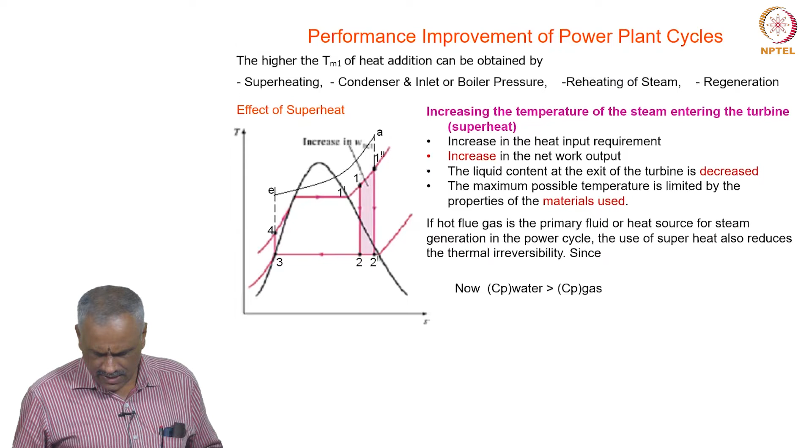We mentioned in the previous class that we can go for superheat like this, but the problem is the metallurgical parameters are the important ones here. So there can be some maximum temperature of the cycle, which is important. If you look at the specific heat of the water, it is greater than that, and mainly the materials used is important in this case, which we discussed last time.

Another thing is, if you go for higher temperatures, like 400 to 500, there is a reduction in strength by 30%. In the previous class we have seen that the maximum steam temperature can go up to 620 degrees Celsius so far.

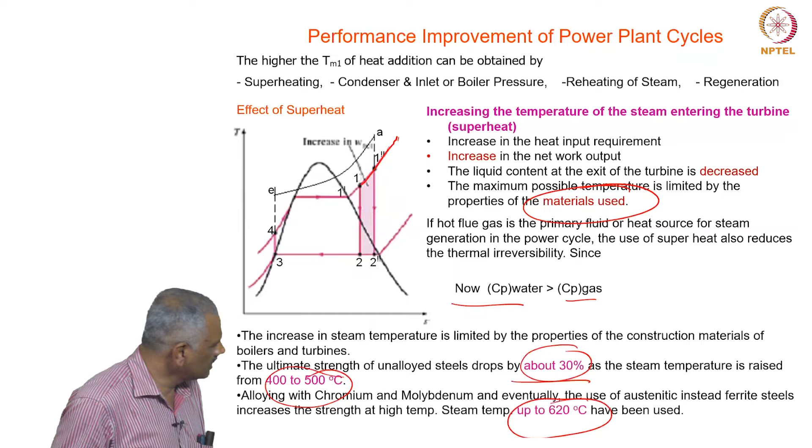Then we also discussed how the pressure plays an important role. Pressure of the heat addition, mainly heat addition pressure, is important here. So we can keep the maximum temperature the same, the cycle's highest temperature the same.

But if you increase the pressure, we get additional work output, but there is a penalty here where we lose some part of the work. One advantage is, if you increase the pressure, obviously you will have high additional work, but there is a reduction in work on the other side.

Not only reduction in work, but also, after the expansion of the steam in the turbine, the exhaust condition of the steam becomes more wet. Therefore, there is a possibility of eroding the blades as we go to higher pressures.

By keeping the cycle temperature the same, as you go for higher pressures, and if you go for single expansion with a single turbine, it is not good, because whatever incremental heat energy or work we get out of that, there is a loss also from the other side. So higher pressure is always better, but not with a single expansion.

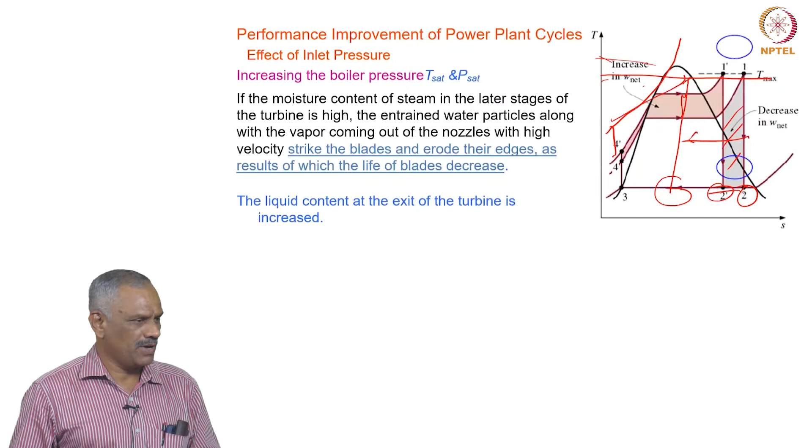But if you go beyond this dome, that is what we discussed in the previous class - this is a supercritical condition. It goes to the supercritical state, exactly out of the saturation line, that is the dome. When you go for supercritical conditions, you cannot keep the same temperature, and if you go for single expansion, you have to also increase the temperature.

So the temperature here, then this point is most important - why? Because it should not go below 88% dryness fraction. So if you increase the pressure and expand from the exit of the boiler or steam generator, you have to go for higher temperatures also.

If you do not want to go for higher temperature, there is another method, reheat, which we will discuss. So this is the supercritical case. As I mentioned, this part is heat addition, and this heat addition in a single component is called a once-through boiler, or supercritical boiler.

Last time I explained this, and the pressures are in this range - supercritical pressure greater than 22.09 megapascal, or 220 bar.

If you draw a line vertically from here, suppose this is a constant pressure line, it goes like this. Then how do you expand - you fix this point here, up to about 88%, and then go vertically up, and wherever it meets, that is the corresponding temperature.

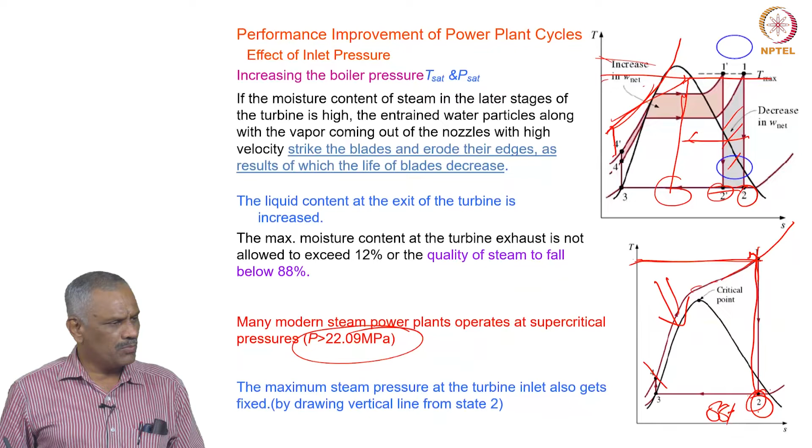So I have shown how a supercritical power plant operates, but in a practical case it is not so. We will see what the practical case is.

Another important thing, which I also mentioned last time, is reducing the pressure of heat rejection. What we discussed previously was increasing the temperature and pressure where you are adding heat. For a heat engine, you have two...

So, you can increase this temperature and pressure here, but why do we not manipulate this T2 and P2 in such a way that we will have higher efficiencies. Here the main important thing is the temperature is the most important thing at heat rejection. You cannot go below atmospheric temperature, so then you can adjust only the pressure according to the atmospheric condition.

Okay, this part you can go further here like this, then you can get this work and go to higher pressures by pumping. Then you get additional area, but the problem is, as we go down, you cannot go down because the temperature is the limiting parameter, since it's atmospheric temperature, and the pressure corresponding to that is the saturation pressure. You have to go for the saturation pressure corresponding to that temperature.

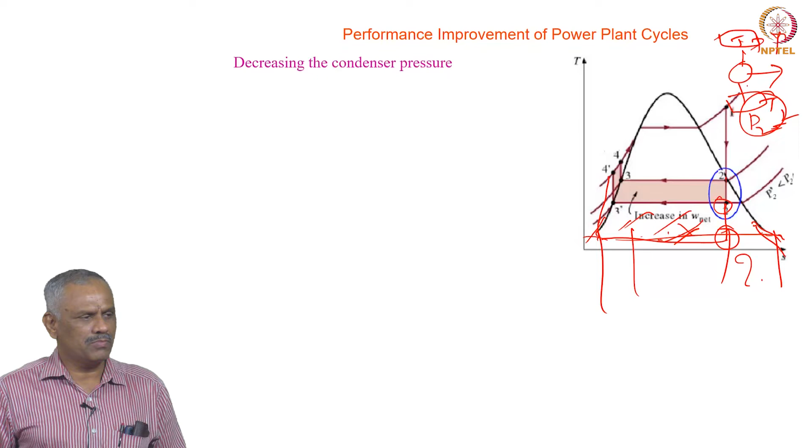So therefore, the only parameter which limits here is this atmospheric temperature and corresponding pressure. This is also a good idea, but we cannot go below it, especially since temperatures in India are very high. So therefore, corresponding pressure may be 0.1 bar, you can go to that suction and do that.

This is another one. I have already explained earlier, whatever is written in the text here, it is already explained.

So this thermal efficiency of the condensing steam power plants will be less in the warm regions, which I have mentioned, as compared to others. So that means the power plant efficiency differs from location to location, depending on the atmospheric condition, and also if in Chennai there is a power plant, it gives different performance at night as compared to the day, because your night time temperatures are different. So therefore, this heat rejection also plays an important role.

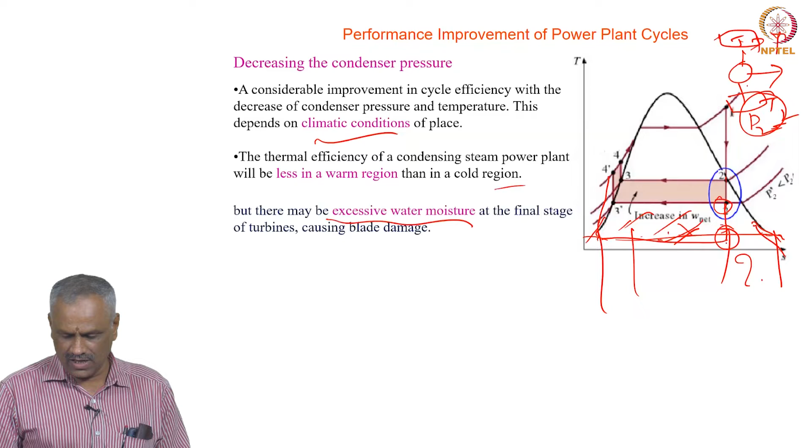That I just mentioned, excessive water content at the exhaust. Here, if you go here, you have excessive water content. At this point 2, this location, you have excessive water content which may erode the blades, and maintenance will be high.

So then we have seen 3 or 4 parameters. We have seen superheat, which means increasing the highest temperature of heat addition, increasing the pressure, supercritical pressure, and reducing the pressure at the condenser. But then, except for superheat, the other two - increasing pressure - have some penalty on the other side. But except for increasing temperature, you cannot increase the temperature beyond a limit because of metallurgical constraints.

So then under these limitations, how to improve the performance and how to come up with an optimal condition, how can the performance of a power plant cycle be improved? This can be done by increasing efficiency without increasing the temperature of the turbine, because temperature is the most important highest parameter. We will always keep the most important parameter, the highest temperature of the cycle, and then with respect to that, how do we improve the performance of the system, within the maximum permissible temperature.

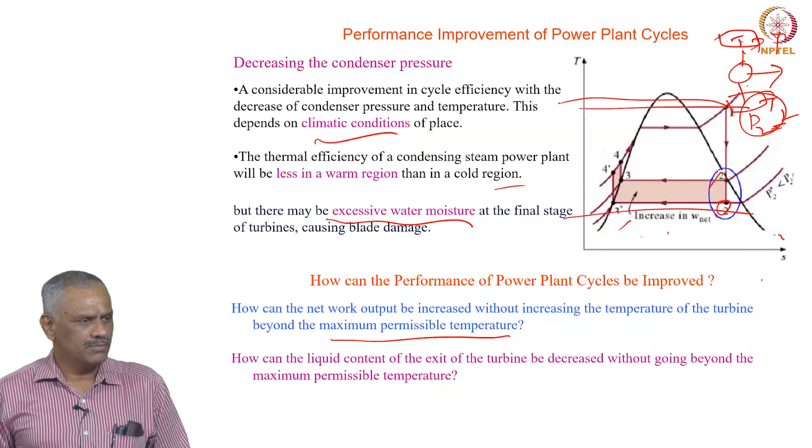So another important factor is this liquid content at the exhaust of the turbine. We cannot go beyond the maximum permissible temperature, because our limiting parameters are here and here, so you operate within that dome. How do you come up with the best way? Because you have both highest temperature and lowest temperature limitations, that is what determines your efficiency, 1 minus T2 by T1. So within these given conditions, how do we make the best or most efficient power plant?

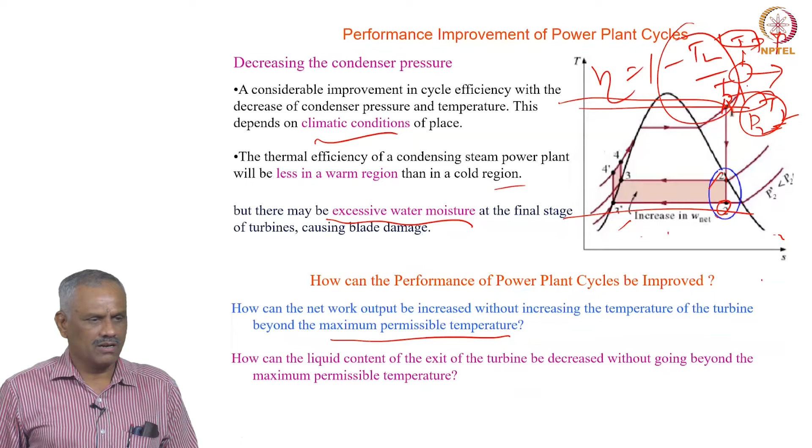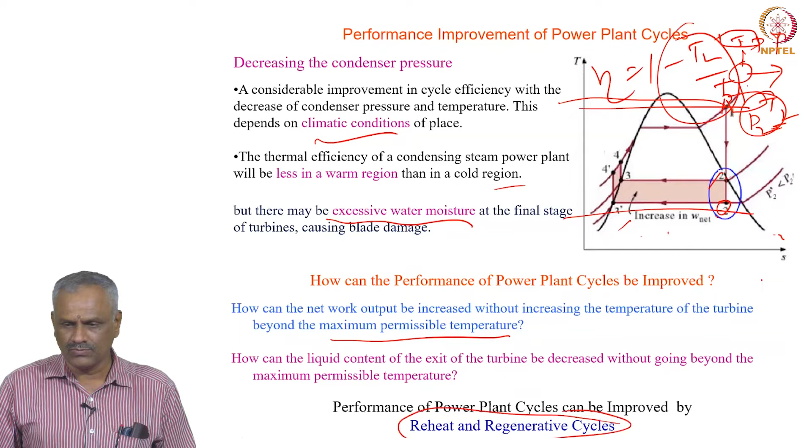So then the performance improvement can be done by two important aspects, that is reheat and regeneration. Reheat and regeneration - what is reheat, what is regeneration, I will discuss.

We will discuss with the first pressure. So if you increase this initial one, it was like this here - I think it is not working.

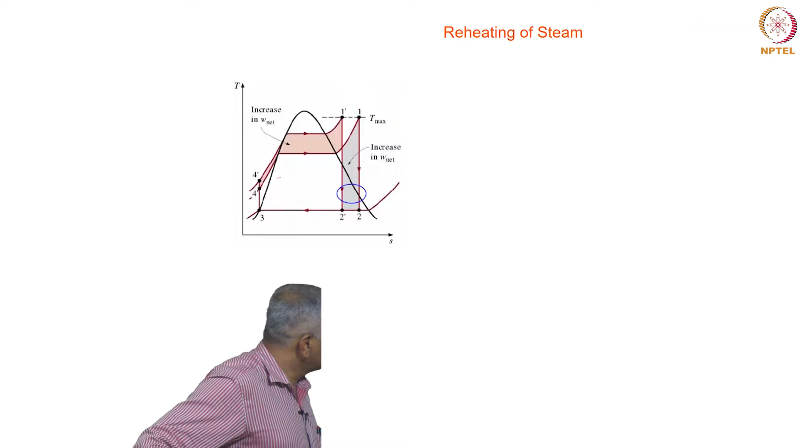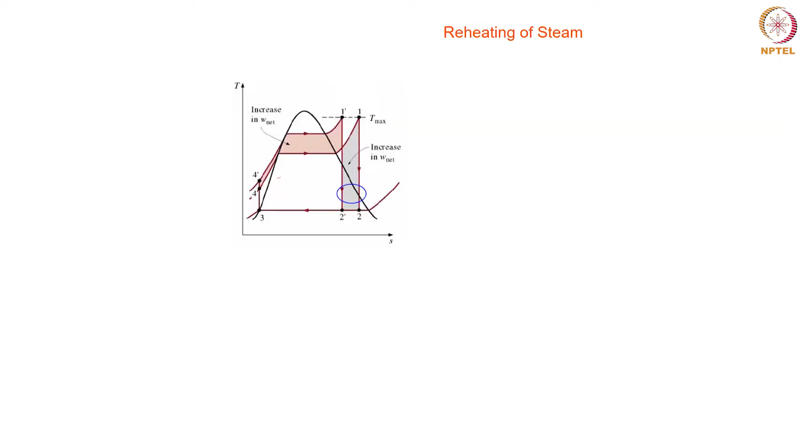Initially, no board was there. We thought we'll increase the pressure, but there's a disadvantage. For the initial cycle it was 1, 2, 3, 4, but if you increase the pressure there's an increase in work output, but a decrease here too. So why don't we compare these two, combine them, going for a higher temperature as well as this one, and come up with a new cycle that combines this.

That is important here. How do we do that? Keeping that in mind, this is the one which you can come up with. Anyhow, my photograph is not important. We can use the board, but I will make use of this itself. So if you combine this, your new cycle will look like this. See here, 1, 2, 3, 4, 5, 6 and back to 1. This is the cycle.

What we're doing is, initially in the boiler, heat is added between 6 and 1. This is similar to the previous one, and from there you reach the highest temperature of the cycle. Then you expand to some level in a turbine, take the steam and put it back into the boiler, which consists of the entire system. Then you add more heat to raise its temperature to the highest again, there's some work done, and after that you further expand, add heat to the same maximum temperature, and from there expand till the condenser.

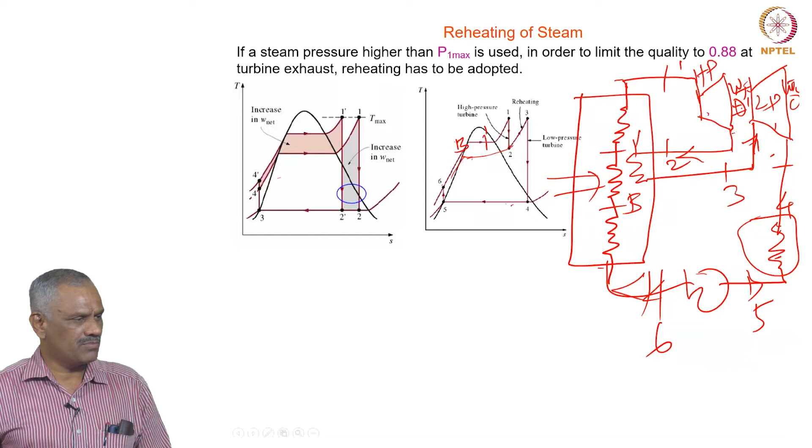After expansion in the first turbine, it goes to some pressure here, this is a pressure line. At this pressure you're further heating. Since the first turbine operates at higher pressure, this is called the HP turbine, high pressure turbine, and this is the LP, low pressure turbine, because it operates at low pressure compared to this one.

Once you plot this TS diagram, it's easy to find out what you essentially need: the efficiency of this. What is efficiency? W net by Q1. What is Q1 here? What is W net here? W net equals the power developed.

This is WT1 plus WT2, the work done here as well as work done here, minus pump work—the pump is here, only one pump. So W net by Q1, where heat is added. Heat is added here, from 6 to 1. But anyhow, we represent everything in terms of enthalpies later. Is that the only heat added, or is there any other additional heat added?

Plus Q2 to 3, this here also heat added, correct? So therefore, this is the heat addition. Now how do you find out all these? Simple, find out enthalpies at different locations from the steam table and substitute.

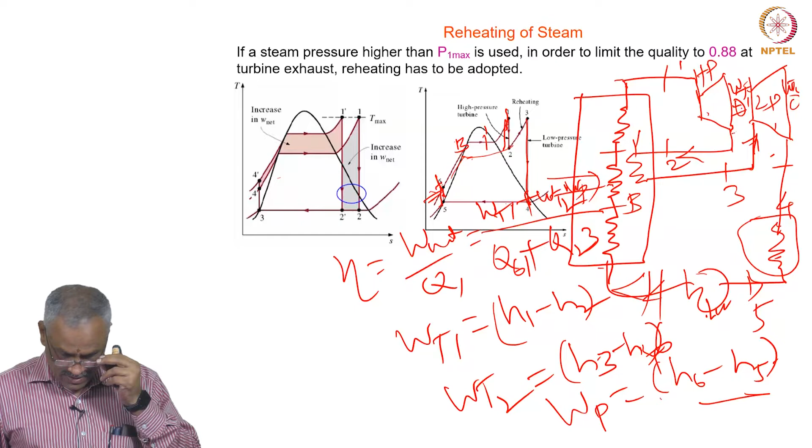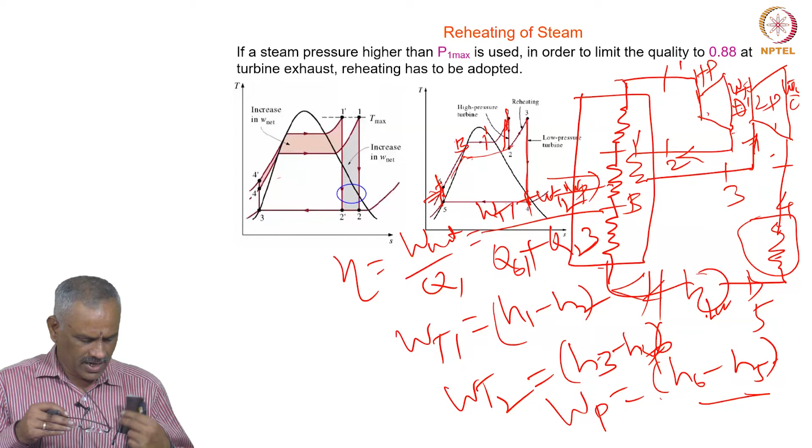But here, when I have included minus, in this efficiency equation I put minus WT plus WT1 plus WT2 minus WP. In that, net it is coming. So I think now I'll erase this, it is clumsy, I will erase all this.

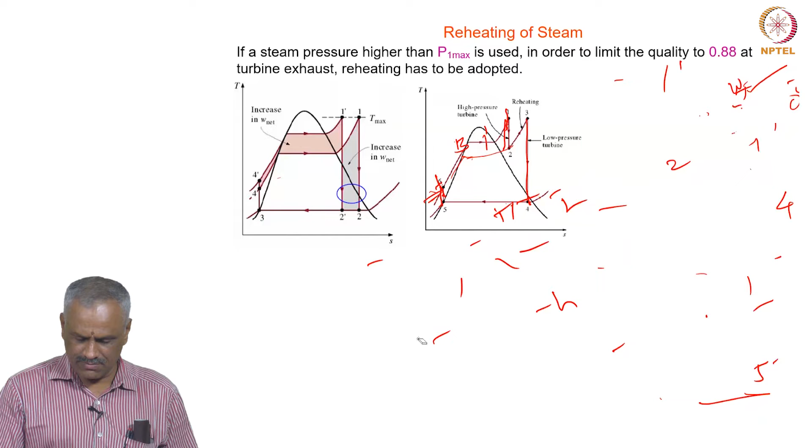I hope you have seen that schematic. Again I will redraw that, for better understanding you can see here. Generally I put heating as a resistor, but sometimes they draw this boiler as one box, and the condenser is written in this. Different notations are there - you can also use a resistor to transfer heat from one to the other, as a heat exchanger. So this is what you can see here.

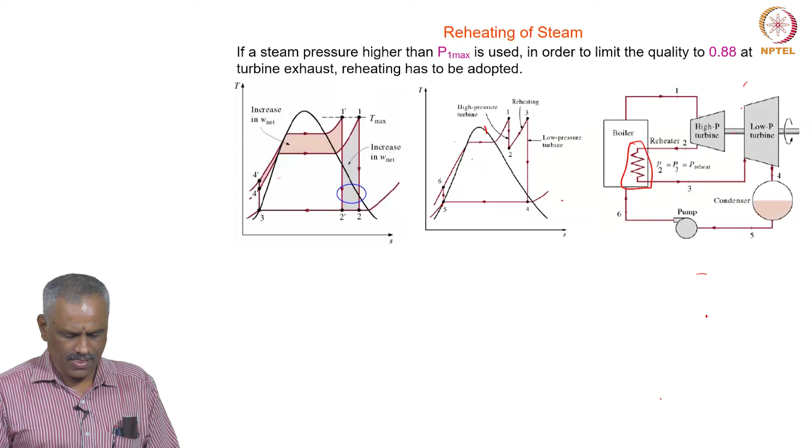One is high pressure and low pressure, and the part where the heating is done before expansion in the second turbine is called the reheater. So this part is called reheater, because we are reheating the same steam.

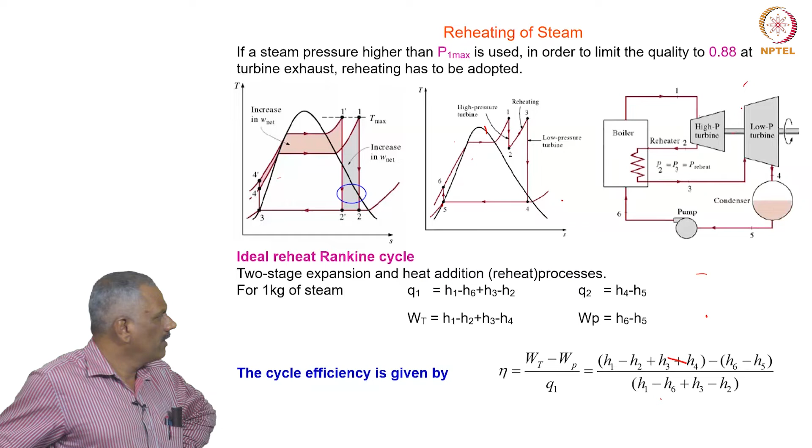I think I have mentioned this - this is an ideal cycle which I have already covered, I need not repeat that again, you can put it here. Cycle efficiency is given by this - I think this is minus here, but not plus, okay.

So now, what is the net - whether this net output will increase or decrease? Is reheat good or bad? Why is it good? Because we are getting some additional output, but we are also adding some additional input. This part we are adding, additional heat, but you are getting some additional output. So when you do this, it should be positive, then only it is worth it, otherwise it is not worth it.

The work output you get for the input you give - the additional work output for the additional input should be more than or on the positive side, then only you can go for reheat. Otherwise, if you are heating more but the additional output you get is less than that, then it is no use. So therefore the net output of the plant increases with reheat, so it will increase.

And apart from this advantage, another advantage is we can operate - see, if it would have been a single stage, it would have come here, but since we are increasing here, the quality of turbine exhaust is also improving. Improving means you can make it close to 88%, that is the improvement. So the advantage is you can go for higher pressures by going for reheat.

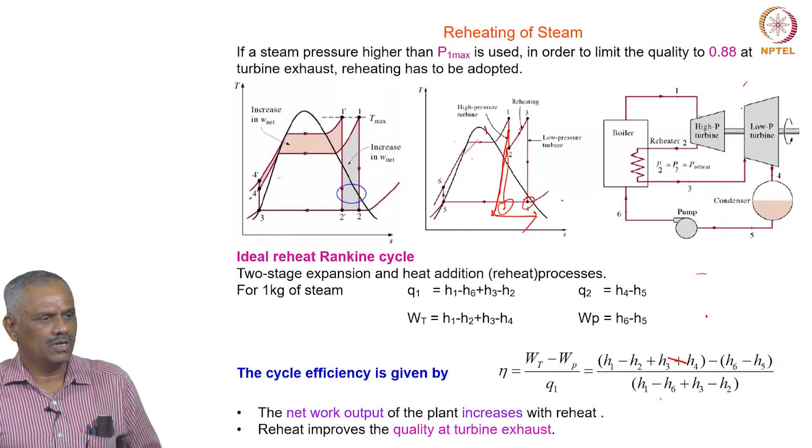If you go for higher pressure, what happens - as you go to higher pressure, if you expand in a single stage, it becomes wet. Instead, you go for reheat and expand further. So the advantage is operating at higher pressure and also getting some additional output. This is the one which I have already mentioned here.

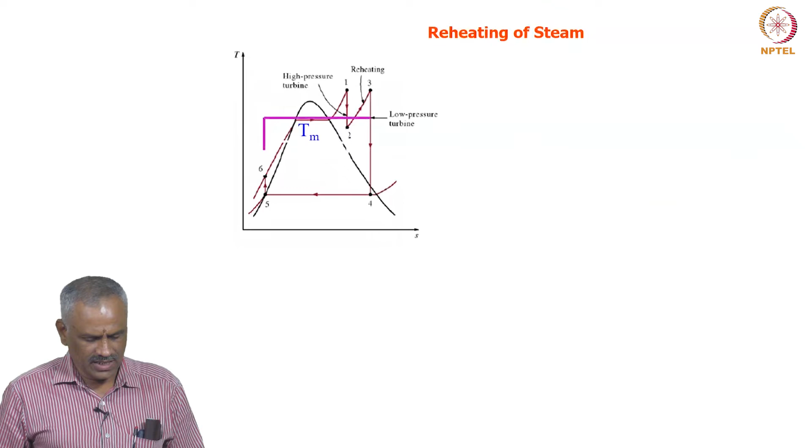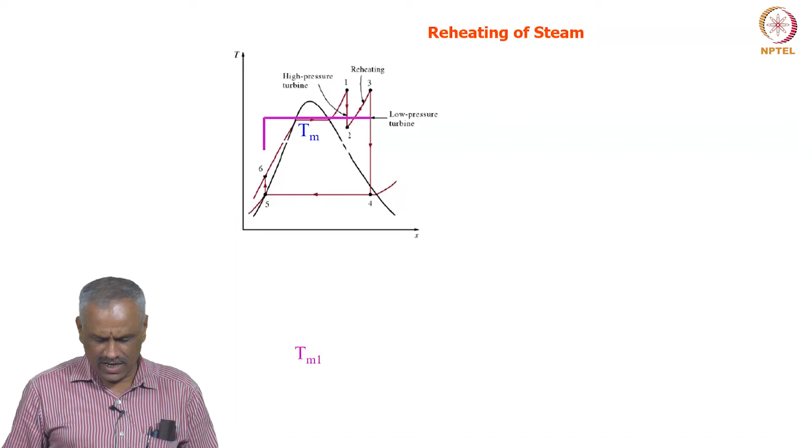Then actually the main objective of improving the performance is improving the mean temperature of heat addition. Always in this case we have to increase the mean temperature of heat addition. In the previous case we found that delta H by delta S is called the mean temperature of heat addition. So here, this mean temperature of heat addition is improved because the average area under this curve is improving with the given temperature. So therefore the mean temperature of heat addition increases, and it increases the superheat by using higher pressure also - just now I mentioned the same thing, high temperature steam.

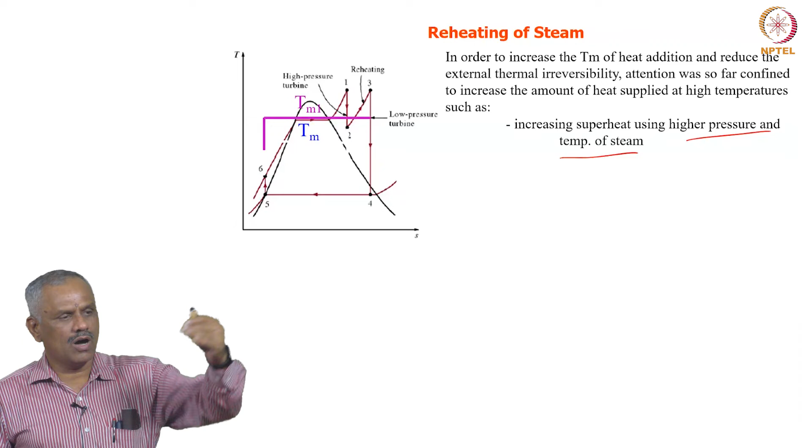The advantage of reheat is you can also operate at higher pressures. Then using reheat, this Tm, the mean temperature of heat addition, is also increased by reducing the amount of heat added at low temperature. This means the heat added between 6 and 1 is at high pressures, this is the higher pressure boiler, and in the reheater once you expand, the pressure is reducing, so that heat addition is at low pressure. In the reheater the pressure is low, so there we are adding heat, that is the meaning of that.

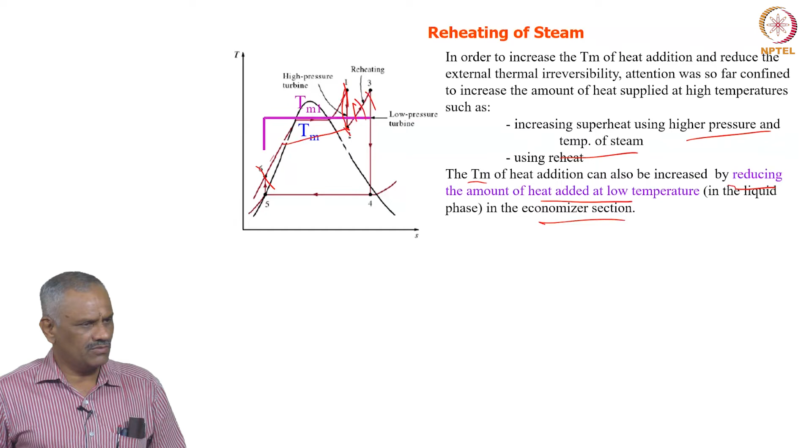So by doing this, instead of only transferring heat in the 3 components, you are also transferring additional heat in another component. Because we have the highest flame temperature of 1800 degrees Celsius, by adding reheat you are extracting more energy from the flue gases, otherwise it would have gone waste to the atmosphere. Generally 2/3 is rejected into the atmosphere.

So in the furnace, this irreversibility could be eliminated, but the problem is if you look at the one stage single subcritical single phase diagram which I had shown you earlier, this is where we defined pinch points in the previous classes. What is the pinch point? The minimum temperature difference between the 2 streams is called the pinch point. One pinch point is here and another pinch point is here, because this is the flue gas side and this is the working fluid.

It goes in the opposite direction, counter flow heat exchangers. In a network of heat exchangers, wherever you have a minimum temperature difference between the 2 streams is called pinch point. If you have a maximum difference, then it's not good, because it involves high irreversibility. In this figure, where do you have high irreversibility? One point is here, because here you have a huge temperature difference, another point is here.

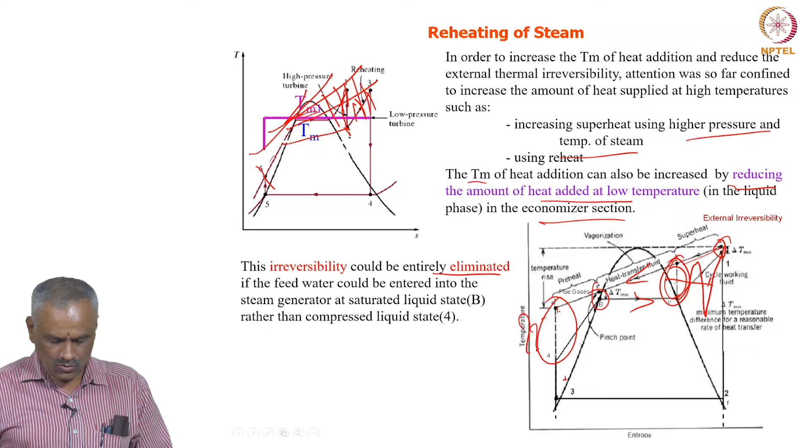But there is a big irreversibility here, a large amount of irreversibility between this and this, okay, this and this. This irreversibility is a major thing, so this irreversibility we should minimize. How? That is called regeneration. If you eliminate, you cannot completely eliminate, but you can reduce that by a process called regeneration. So what is the meaning of regeneration?

The meaning of regeneration is you take the heat internally and add it back, regeneration. You have expanded here, till here. Then what you do is you take this part, generally take this part, for example, I will plot a schematic. This is a simple one without reheat.

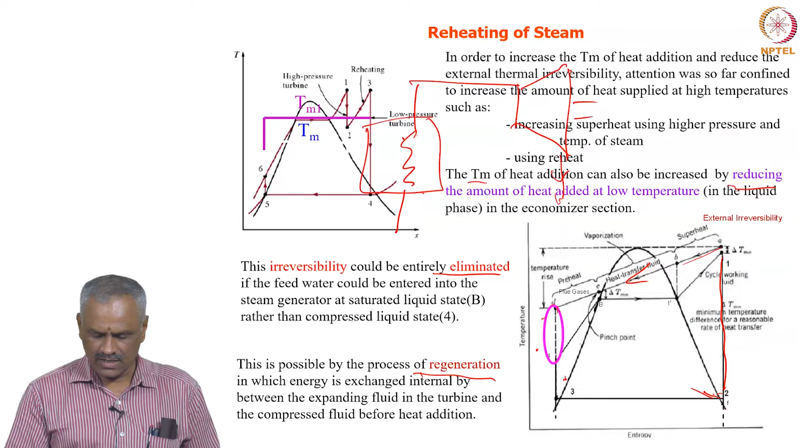This is a boiler and it goes to the turbine here, and after expansion you take this. During expansion, from here to here, what happens is its enthalpy drops and also its specific volume increases. That is why you have an expander.

What you do is you take this, turn around the turbine and then bring it and pump it here. It is called regeneration. That means while the steam is being expanded in the turbine, you bring some part of the heat and add it to the outgoing or incoming working fluid, that is called regeneration. Maybe, since this is a bit clumsy, I will show you in the next one.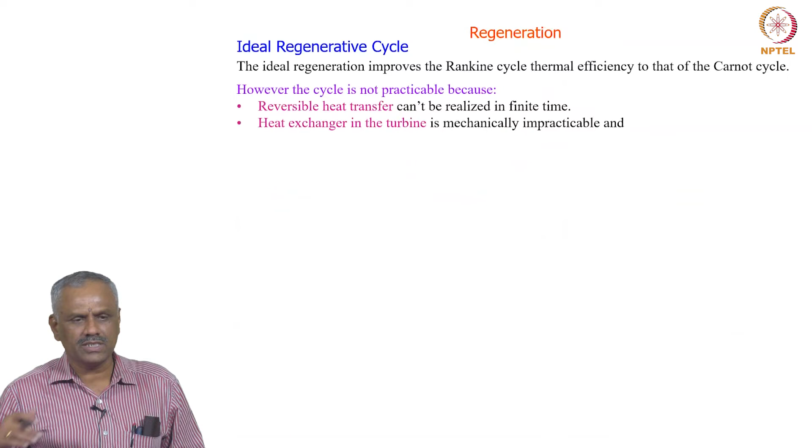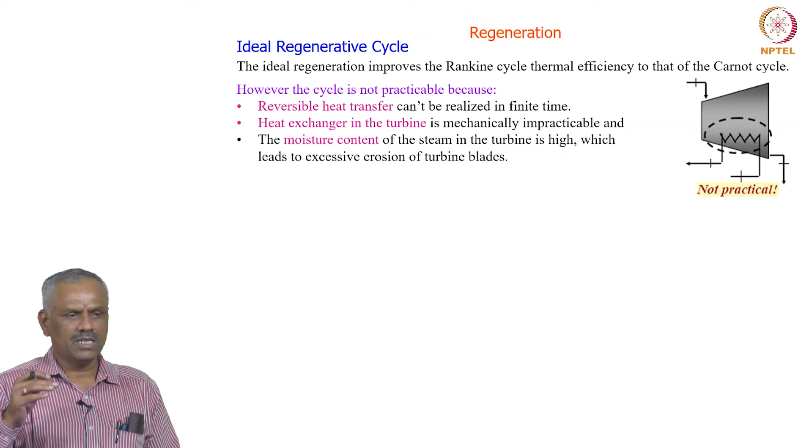The ideal regeneration means it is reversible. In a turbine, expansion is isentropic, meaning there is no heat transfer, it is reversible. So then you can wind a heat exchanger within the turbine mechanically. You can take some part of the turbine's heat during the expansion and bring it back. So the one I showed you earlier, where you wind or wrap the steam pipes around the turbine after expansion, so that heat during the expansion is transferred to this, and the inlet fluid going into the boiler will be at a higher temperature, so that you will have less irreversibility. But the ideal process of expansion is isentropic.

Isentropic means there should not be any heat transfer, but when you introduce some heat exchanger and wrap it, it is not so. See, your dome is like this. This is isentropic expansion, but when you remove heat, this cannot be isentropic - it will cool, it will lose some heat to this one. Then obviously we are going to lose some heat.

Have you studied Stirling engine? Stirling engine is a regenerative engine. During the expansion, some heat is transferred, so instead of heating, you will have a better heat transfer on the other side.

I will show you this, but it is not practical - ideal regeneration. Ideal regeneration means during expansion you remove heat, but that is not possible because we cannot have a heat exchanger within the turbine like this. And second, it may not be ideal expansion because it deviates. So therefore I have mentioned this.

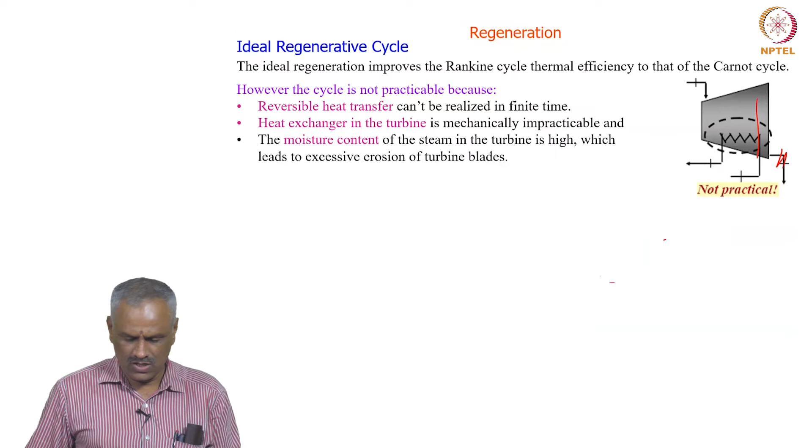Another point is when you remove heat from the turbine, the exhaust steam will become more wet, so then the last stage turbine blades will get eroded. Therefore ideal regeneration is not possible. So we have to go for a different way of regeneration, using heat, but a different regeneration.

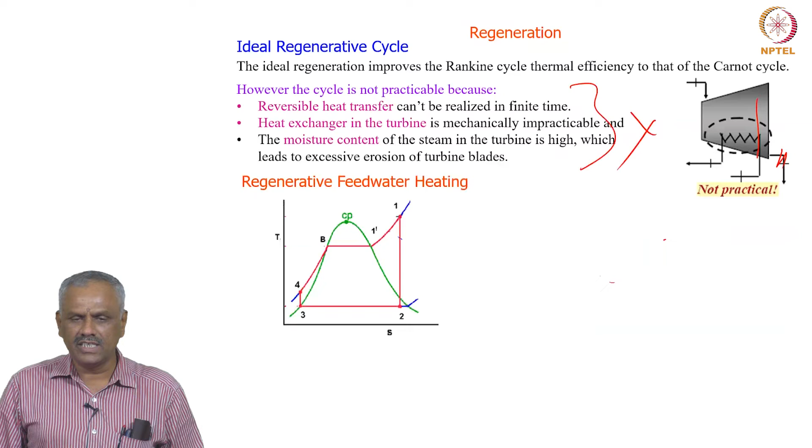This is called regenerative feed water heating. Before entering into the boiler - see here, the water is pumped to this boiler part. Before entering here, you bring this heat and raise the temperature, so that this irreversibility is reduced from here to here.

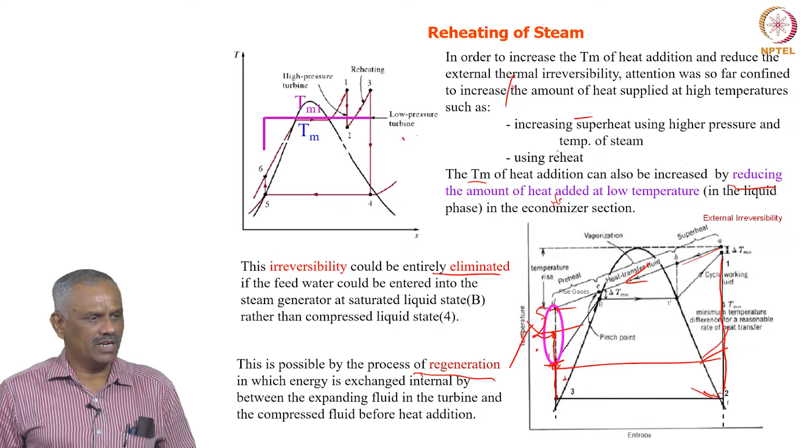What you do is take some part of the heat - instead of doing it in the turbine, you take some part after expansion and mix it. That is called regenerative feed water heating. I will show you how it works.

So this is the normal cycle, the standard cycle: 1, 2, 3, 4, B, 1 prime, 1. This is a single stage turbine, single expansion. After expanding to some level, then you take it this way.

After expansion from 1 to 2, some part of the mass is taken. If you take 1 kg of mass entering the turbine, after a certain level of expansion you take m1 mass, and 1 minus m1 is further expanded here. Then the heat is rejected in the condenser and pumped to the next pressure level, and combined - 1 minus m1 with m1 - then it becomes 1 kg and goes on.

Have you understood that some part is taken? After expansion in the turbine, some mass of the steam is taken at low pressure and added with this, so that this heat is combined with this.

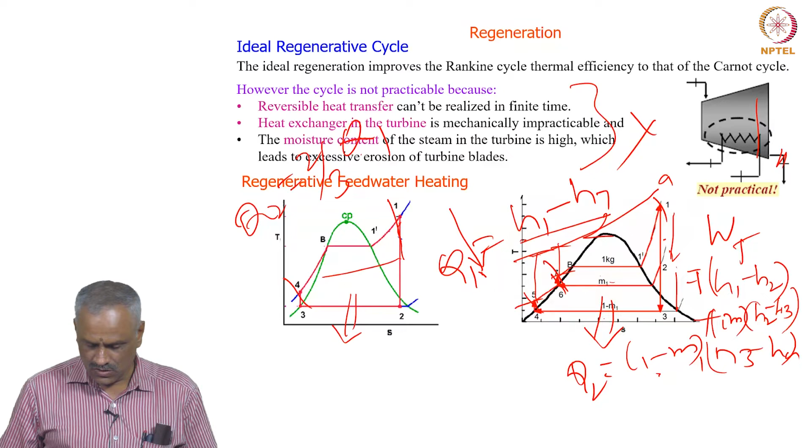Is it clear? So therefore, the heat rejection - you are reducing the irreversibility, you are also going for reduction in the condenser size. So this is the advantage, I hope you understood that. So now the heat rejection will be less in this case.

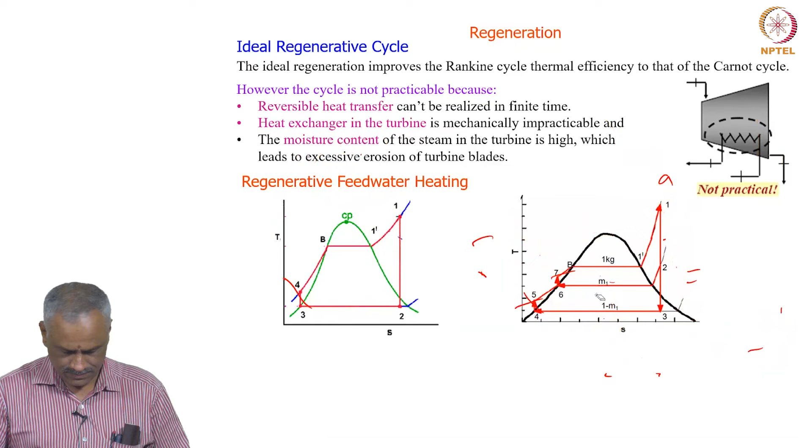Now another important thing is the economizer size, because this part is economizer, from here to here. If you go here, now the economizer size is only this much. We are not only reducing the condenser size, but also the economizer size. The economizer has to raise heat from here to here, whereas here the economizer will be from here to here. So that is an advantage.

So now, based on this, you can say that this is called regeneration. Regeneration means taking steam after expansion at some level and mixing it with the feed water to heat it - that is called regeneration.

So now, how many times have we taken this? Once, a single time. You can take more times also. You can take steam here and add here, and take here and add here. You can have infinite steps if you take it continuous. But then your cost and other issues will come.

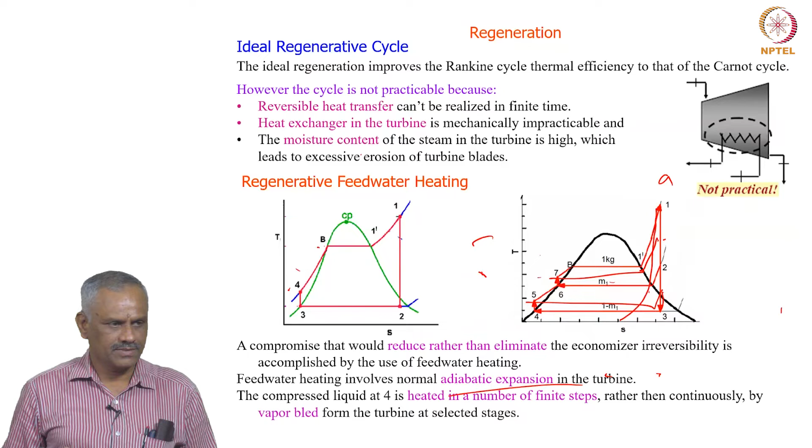So therefore, you have to go for not one time, maybe finite times. In a modern power plant, it may vary from 7 to 9 feed water heaters. We will discuss how that is.

So this is called feed water heating, which is a heat exchanger. Now I will show you how you represent this in terms of a schematic.

There are 3 types. If you look at here, this part where the heat is added to the water which is coming from the pump - these are mixed and further pumped here. So what is the source of irreversibility? We have mentioned combustion is one, heat transfer is another, then friction - fluid and solid friction. The other one is throttling, and another is mixing.

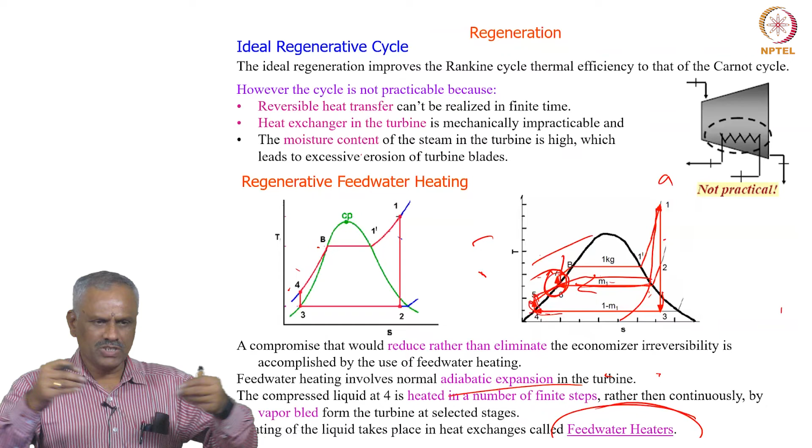If you bring two streams and mix them, then it is irreversible. Here at this point we are bringing one stream at this pressure with m1 mass, and another we are taking from this pressure line, and pumping further. So that means you are mixing two streams. When you mix two streams, there is a possibility of irreversibility here.

Some irreversibility is created. But then how do we avoid this irreversibility? Then we have to go for configuration of feed water heaters.

There are different types of feed water heaters, mainly 3 types. One is open or direct contact type. The other one is a closed with drain cascaded backward, and the other one is pumped forward, the drains pumped forward.

I will explain how this works. Open or direct contact means you bring one high pressure steam and low pressure steam and mix it. That is simple open mixing, but the problem is irreversibility. What you do in the other type is bring high pressure, high temperature steam and heat the other one, but there is no contact between them, like a heat exchanger. This is a contact heat exchanger, the other is a non-contact heat exchanger.

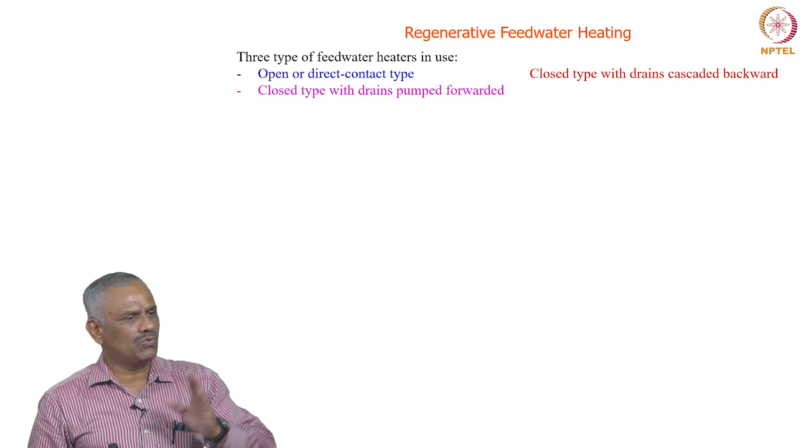The other question is how, after transferring heat, whether you go forward or backward, which we have to see. We will discuss this quickly one after the other - the regenerative cycle or regeneration cycle with the open feed water heater, the one which I showed you here just now.

What happens is that at pressure P1, this is the boiler pressure at the highest point, then this is P1, this is P2 and this is P3, which is the condenser pressure. So you are expanding from high pressure to low pressure and further low pressure.

So then one stream is taken with mass m at point 2 and added here with the other stream of mass 1 minus m from lower pressure. This is at one pressure and this is another pressure. So what you can do is, where are we adding these 2 streams? At this point, okay.

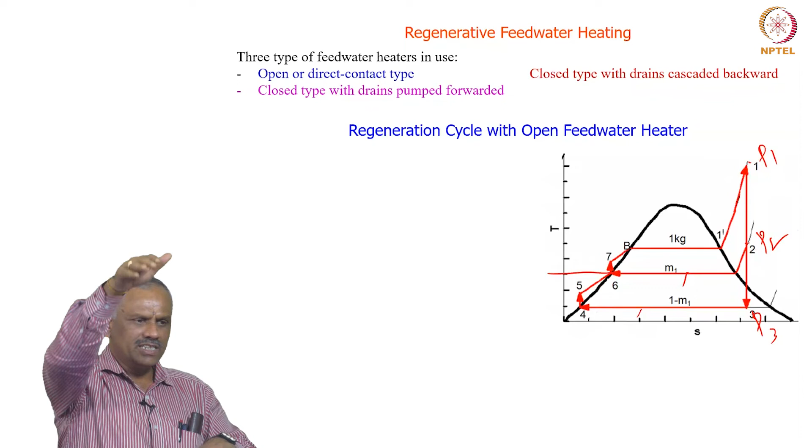Taking a stream at high pressure and mixing it into the low pressure, there is no problem, because we are going high pressure to low. But if I want to add low pressure steam at a higher pressure, what do I have to do? See, this one is coming here, bringing it to here, there is no need, it comes automatically because it is at lower pressure.

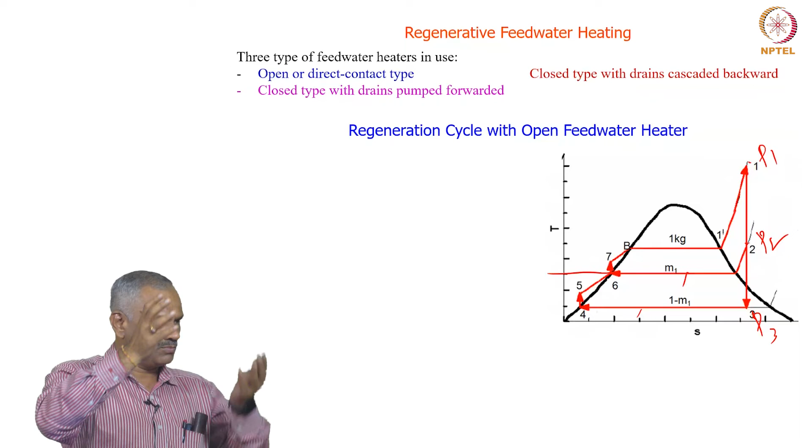But I want to mix here, take this and put it here. What is the meaning of that? I have to pump it, I have to pressurize it to that level. So therefore one pump is here. I will show you the schematic of how it will be.

So now if you look at the schematic here, after expansion in the turbine - again I am using different symbols at different times, because first I used resistances, and this is why, because you should have exposure to different symbols. I don't want to have a consistent symbol, so that when you refer to different books, different symbols are there, but whenever I show that, I will mention exactly what it is.

So this turbine, after expansion to point 2, mass m is taken here, and 1 minus m is further expanded here, then goes to the condenser and heat is rejected, and from this condenser the pressure is lower than this pressure. So we are mixing at a middle point where this is taken and then this is the condenser.

So you need to pump it to this pressure, therefore you need a pump, and after mixing this, you have to go to the boiler pressure. This is the boiler pressure, therefore you have to again further pump it after combining the 2 streams - this is another pump, clear. This pump operates between pressure 2 and pressure 1.

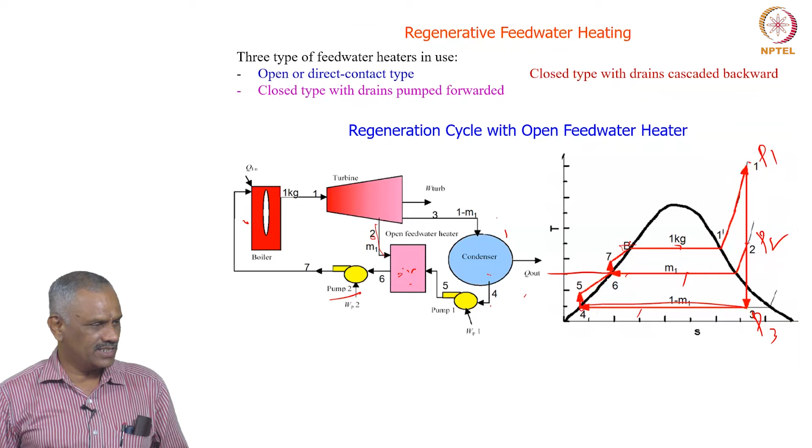This I have already explained. m1 kg of steam is extracted at P2. The steam extracted here means this turbine is bleeding. Bleeding means taking some steam at some pressure, and the steam which is bled is called bled steam. So here, how many bleedings? Only one. If you take one more, it becomes 2 bleedings, 3 bleedings, and so on. So the steam you bleed is called bled steam.

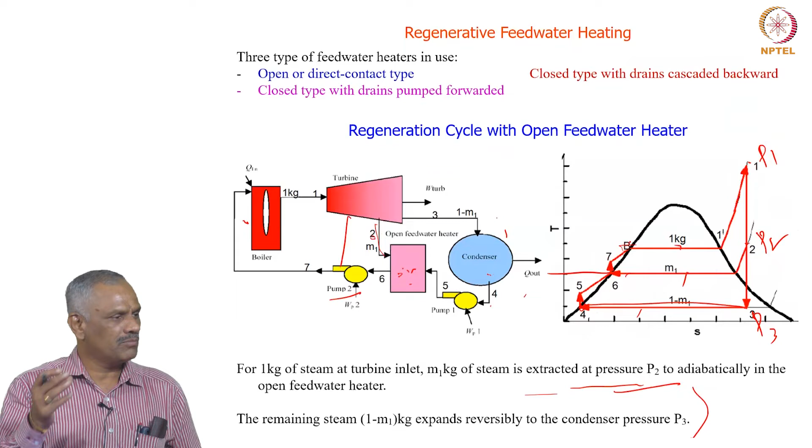Now again I am writing the energy balance here. Turbine work from here to here is 1 kg, and from here to here is 1 minus m into this enthalpy, and heat rejection is 1 minus m into that, as I've already shown. The pump work is the same here, but let me mention it properly. This is 1, and the condenser is smaller. Pump work for 1 minus m is pumped from 4 to 5, that is 1 minus m times H5 minus H4, plus another pump here. This pump handles 1 kg, because M1 comes from the turbine and 1 minus m comes here, then it is pumped to a further pressure. So this is 1 into H7 minus H6.

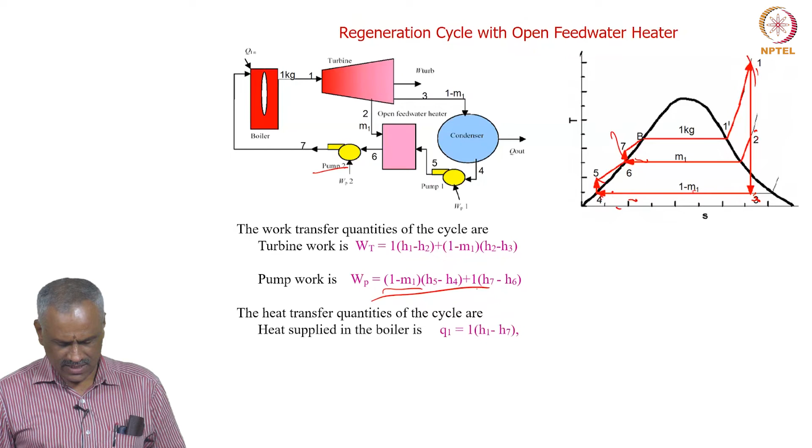Heat addition will be from here to here, H1 minus H7, for 1 kg. Then heat rejection is 1 minus M1 into H3 minus H4. Then the mean temperature of heat addition, which I have already defined for the regeneration cycle.

Here, if you look at H1 minus H7 divided by S1 minus S7, this is the mean temperature of heat addition for the regenerative cycle, whereas without regeneration it will be from here to here, so heat addition will be H1 minus H5 divided by S1 minus S5. Instead we are going for this. So the ratio of this to this will be higher than that. So the mean temperature of heat addition is improved by going for regeneration. Therefore Tm1R is greater than Tm1. That is why we go for regeneration.

And what type of regeneration is here? It is mixing, which means open type. There is a mixing where heat is transferred from high pressure, high temperature steam to low pressure, low temperature steam, and then this is pumped to the next boiler. So this becomes feed to the boiler, which is why it is called a feed water heater — specifically an open type feed water heater.

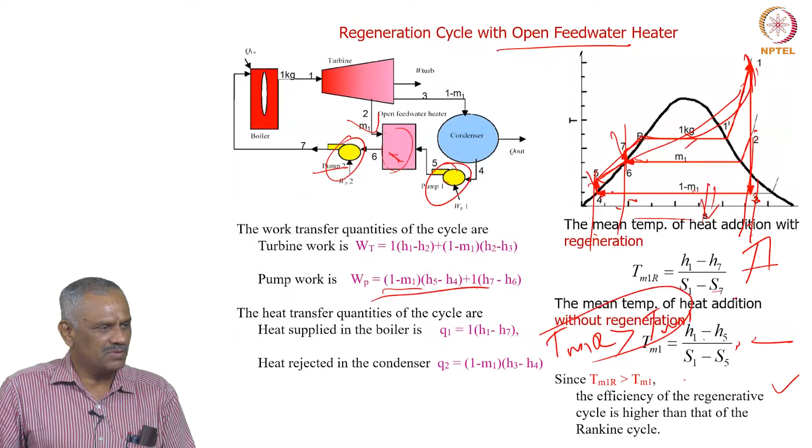Then the next one is the closed feed water heater, called drains cascaded backward. The meaning here: in the previous case, 2 pumps were used; we eliminate 1 pump. How can we do this? I am using a different symbol for the boiler here — you see this boiler has 2 circles, meaning it is a boiler drum, mainly used for subcritical conditions.

So it is expanded in a turbine from 1 to 2, and some part is taken here as bled steam, then the remaining 1 minus m is further expanded, the condenser rejects heat, and after condensation you pump to the boiler with a single pump. We bring the bled stream back to the condenser and pump everything with a single pump, with no direct contact between the streams — this is one stream and this is another. The heat exchanger operates in direct counter flow. This is called a closed feed water heater, where there is no direct contact of the fluids, therefore no mixing and no irreversibility. Then it goes through, and a single pump handles the entire mass, bringing it here.

Generally in a condenser we have to reject heat, but this is steam, and here it is a liquid after condensation. So we cannot afford to allow steam going into the condenser, therefore a trap is introduced. The trap allows only liquid to pass, it does not allow vapor to pass through - that is what a trap is. Now I have given you symbols here: 1, 2, 3, 1, 2, 3, 4, 5, 6, and the other one is 2 to 7, 8 and 1.

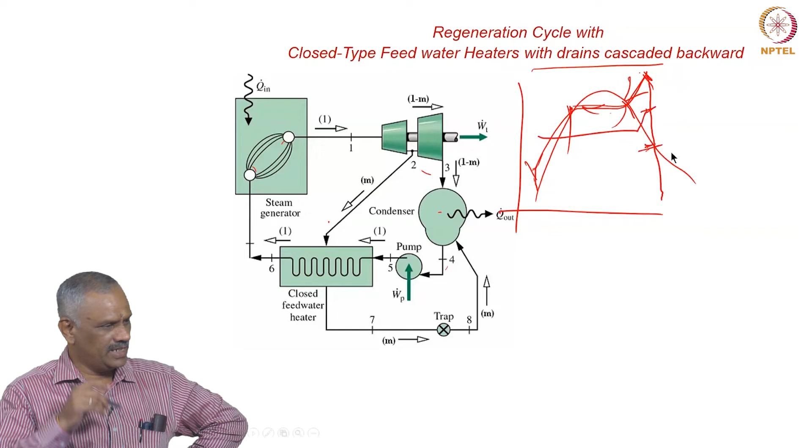So then what happens is, if you expand like this, it is better to take the saturation condition, not the superheated condition. What happens - you have to bring it down and then use it like that. Instead, wherever it meets this curve, there you bleed it, but you can still do it from higher up. But if you go for a single reheat, single feed water heater, you have to go for this.

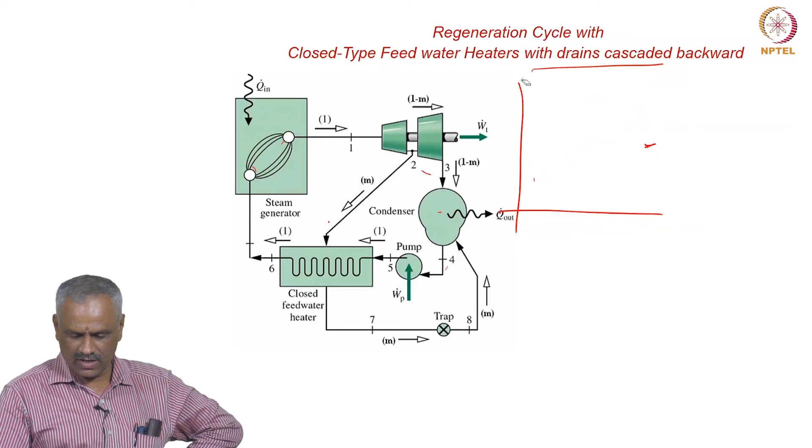So now you can plot that, no? I hope you have plotted it, otherwise you want me to give it - I will give you this. Check it whether you are getting the same or different.

1 to 2 is expansion, and at 2 it is taken. Again this part is de-superheating, because at different pressures, suppose if you take it here, then it is at saturation. You can take it like this and also mix in the condenser, or you can take it here and bring it here and mix here - you can mix anywhere. So you are bringing it back to the condenser here. After this part is taken here to the saturation point, it is mixed in the condenser at 8.

So, heat addition - I hope you understood this, or if you have not understood, I will explain again. So now...

What is it? It is a closed feed water heater. A feed water heater is a heat exchanger, and heat transfers from the high temperature fluid to the low temperature fluid. Which is the high temperature fluid? The steam which is taken from here to here - this is the high temperature fluid, and it is losing heat.

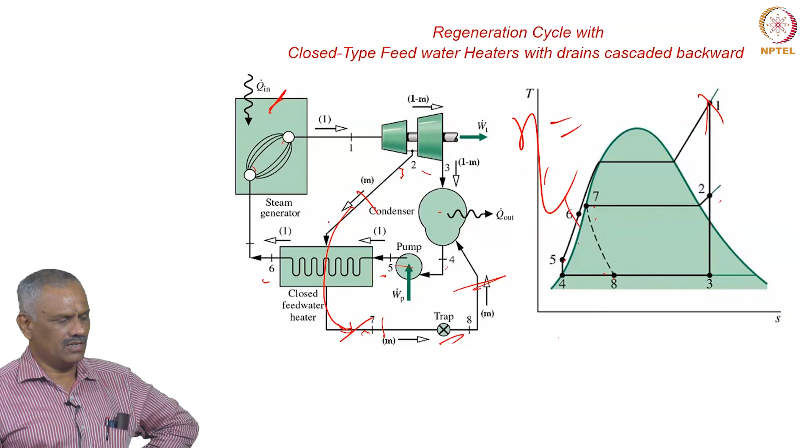Now you can find out the efficiency of this. What is efficiency? Work done by heat input. What is the work done? 1 into H1 minus H2, plus 1 minus m into H2 minus H3, minus the pump work, divided by heat addition. This is H7, H1 minus H6 - that is the heat addition. So now you can do that.

This I have already mentioned - this is called a heater drip or trap. The trap passes only liquid, no vapor - it does not allow any vapor through.

If it allows vapor, assume that it allows vapor, there is no trap, what will happen? How would this curve have been? It will come somewhere like this. So this is a mixture, both liquid and vapor.

When you take it to this point, what is the meaning of that? There is only liquid, this is a liquid line, no? You are taking it to the liquid line and then from there you are mixing it up. So then you will lose so much.

State 7 is full liquid, but there actually at that state you do not mix up the physical picture and the TS diagram. The meaning of that is after 7 there is a trap that allows only liquid. That means at 7 itself you have a trap. So at 7 it completely converts into liquid, and this is a liquid line, is it not? This is saturation liquid, and at 7 it is liquid, not 8. 8 is a mixing point.

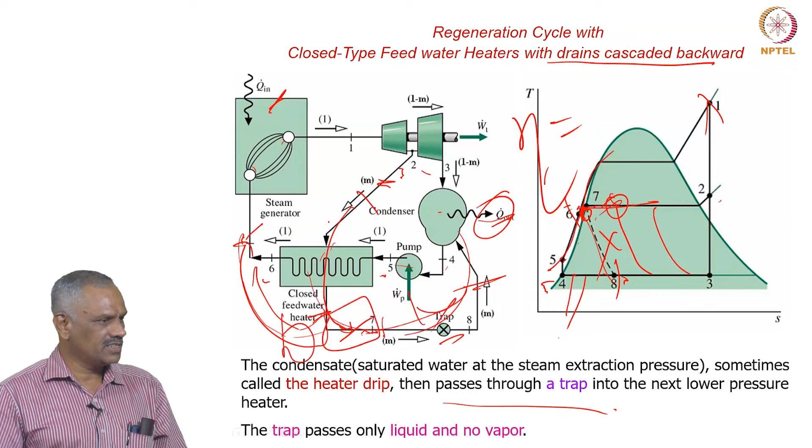So now if you look at that, instead of taking one feed water heater, if you go for more bleed steams here and then use one feed water heater and then take it to this and feed it to the condenser here back, there is only one pump. Can you plot it on a TS diagram?

See, in order to identify exactly where these points are, you need to go for the schematic and a TS diagram. These two are important. The rest of the things are easy because you are just looking at the enthalpies and doing it, finding enthalpies from the steam tables and finding out performance.

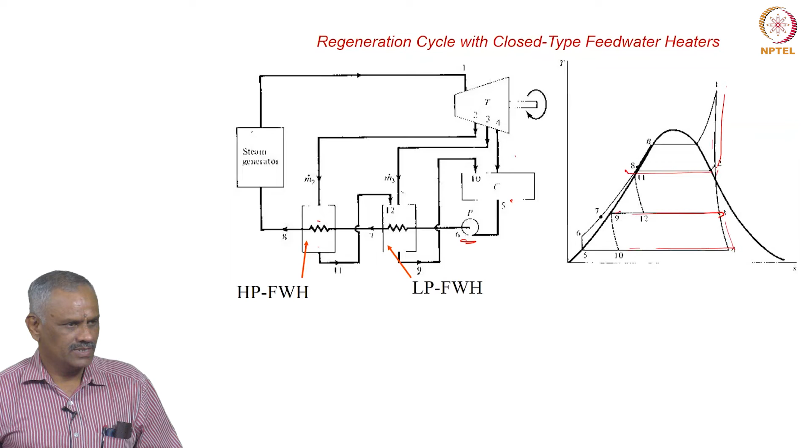So the schematic of that is this, and the TS diagram of this is this. So here, from 1 after expanding to 2, some bleed stream is done, then that is further expanded here and some more is taken, and then further expanded to the condenser. So here the most important thing is this is the boiler pressure, this is feed water heater 1 pressure, FWH.

This is feed water heater 2 and this is another pressure. This pressure is different from this pressure. So it is taken at a higher pressure and then it loses heat to the incoming stream and then goes back and is put into this. This is taken here and put into this, and then both of them go till here and mix into this, the stream coming from here and another one become one and then go into the condenser, and after that further heat rejection is the same as the previous one.

So you can have as many number of these as you want. Essentially what is happening is this, from 2 to 11 is the hot stream and the cold stream is from here to here, 7 to 8. So you have seen the point 8 here, then your heat addition will be between these two. Otherwise it should have been like this.

So we are eliminating this and making the input water which is entering into the boiler close to the temperature difference to the flue gas or the heat addition. That is what irreversibility reduction means. If you go for more number of feed water heaters, it will be more closure, so overall mean temperature Tm, mean temperature of heat addition will be higher.

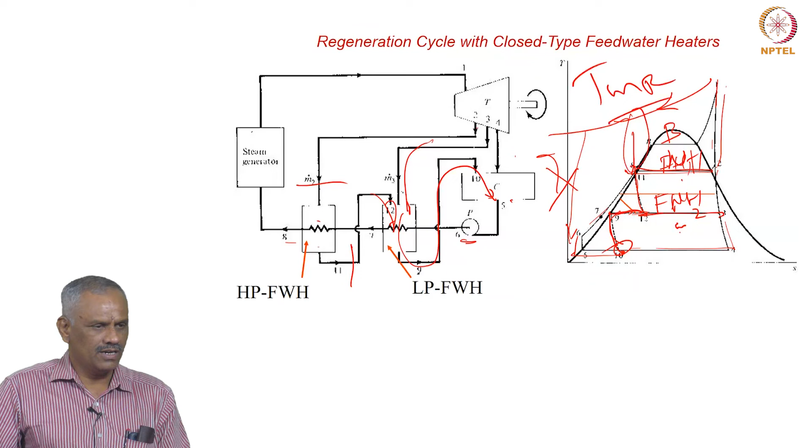So when the feed water operates, all these are closed feed water heaters, they are not open, the streams are not in contact. Where are they coming in contact? Here, the condenser, because all of them are coming and mixing, as the condenser is a mixing point.

See, if in the feed water heater the bleed stream is taken at higher pressure, it is called HP feed water heater, high pressure feed water, and LP feed water, low pressure feed water. So you can go for any number of these like intermediate also.

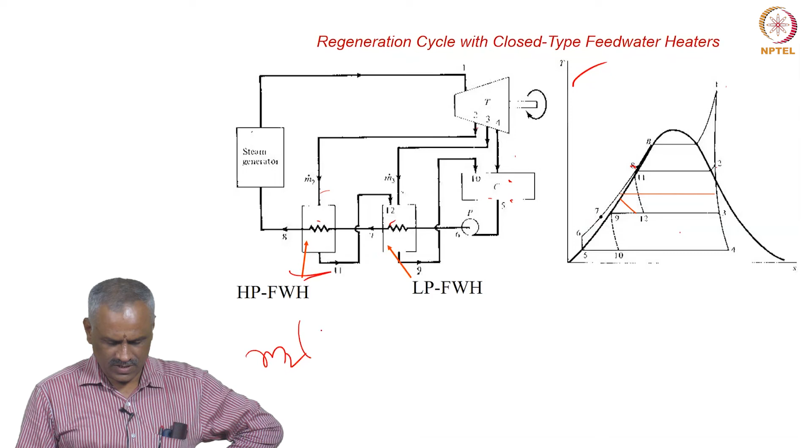M2 into H2 minus, this is what 11, H11. This is the heat which is lost by the stream here, and heat gained by the, which is equivalent to H minus H7, correct, and 1 kg of mass. Okay, in this, if you look at this, this is a balance.

Now we need to find out what is H7, okay, or H8. This H7 comes from balancing this one, another one. Okay, how do you balance that one?

See, M2 into H, this is H11. Just let me use my specs here. So H12 minus H9 plus M3 into H3 minus H9.

This one, no? This is 9 and this is the temperature difference, this is the temperature difference. That is, this is the one here, and the gain which is equivalent to 1 into H6, sorry, H7 minus H6, correct? H is the same, both are same, but here you will have a trap, that is all, it goes into the liquid, enthalpy is same. So this is what here.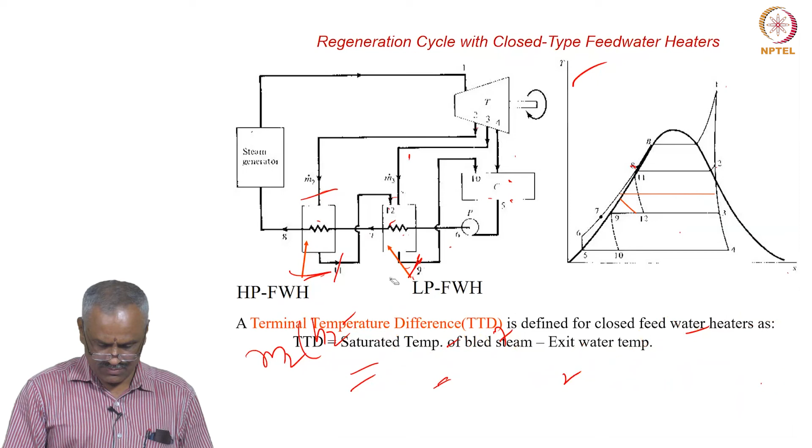Then the most important thing is, what are these? These are heat exchangers, isn't it? These two, I will erase this because you should understand. I am trying to convey one important point, which is the terminal temperature difference.

See, if you look at these, you have studied in heat exchanger, temperature versus length or height. This is in a counterflow heat exchanger, you know this. So this point, see here, if you look at this is out, this is in for this heat exchanger, this is in and this out.

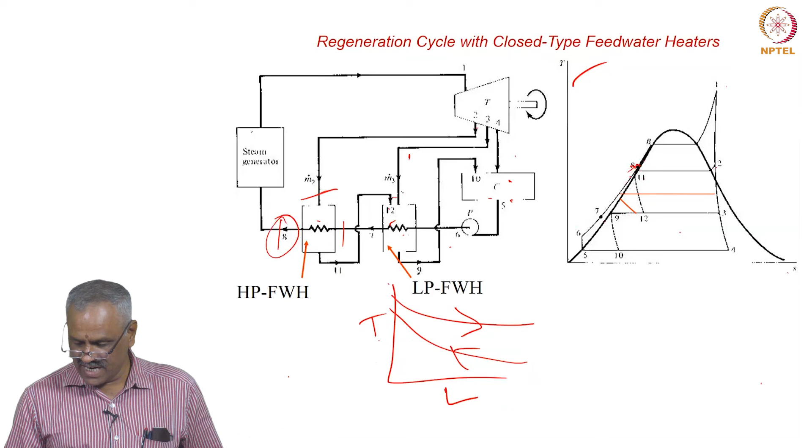This point 8, you see that 8 here is, this one is losing heat and this is gaining here. Where is 8? 8 is here, 11 is here. Okay, this working fluid temperature, outlet exit temperature is higher than this, correct? Can it be possible? 11 is here, this one, sorry, and 8 is here. Is it possible?

Possible. What is the meaning of that? See whether this temperature can be more than this temperature. The temperature of this cold fluid, which is heated, this temperature can be more than this exit temperature. It is possible, but this cannot be more than this inlet temperature.

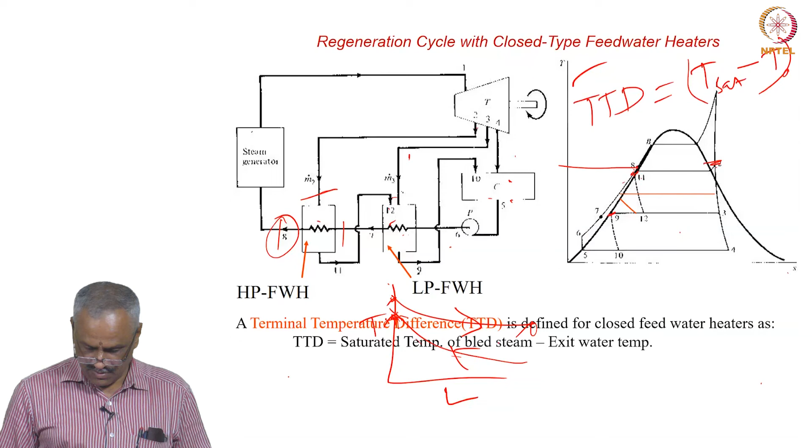You got me? This exit temperature cannot be more than, see this temperature T8 cannot be more than T2, because we are taking fluid there, but it can be more than exit temperature, correct. So therefore, here we are defining a term which we call TTD, terminal temperature difference, which is equivalent to, this 11 is on the saturation line, okay, and here saturation line, T saturation at that minus the T out is called the terminal temperature difference. So you got it, terminal temperature is defined for a closed feed water heater as saturation temperature of the bled steam minus the exit water temperature. What is saturation temperature? T11 here is saturation temperature, exit temperature is T8. So T8 minus T11, T11 minus T8.

If you look at this one, what happens to this? It is negative, correct.

Look at this, it can also be lower than that. If this is a hot fluid and this is a cold fluid, the cold fluid outlet temperature can be lower than this too. It can be higher than the exit or lower, it is possible.

If T9 is the saturation temperature and the exit temperature from this is T7, you've seen here, T7 and T6 from here to here. This temperature is lower than this, so the saturation temperature is T9 minus T7, this is also TTD.

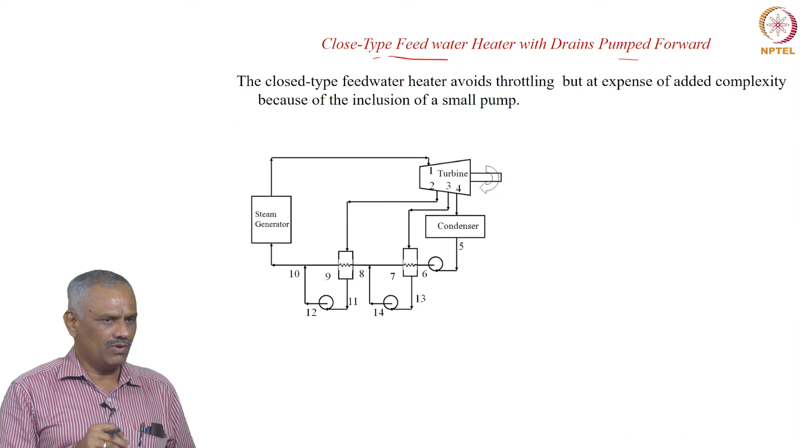In the previous case we brought it to the condenser, and the problem is that the mass holding capacity of the condenser remains the same in case of pumping back, but the heat rejection may be less if you go for a feed water heater. Looking at the previous case, this pump has to handle the same amount of mass, but heat rejection is different if this would not have been there.

Heat rejection will be H4 minus H5 into 1 minus M1. What is the heat rejection here in the condenser? Suppose this is M1 and this is M2, then 1 minus M1 minus M2 is the mass going here, multiplied by H4 minus H5 from here.

Apart from that, M10 is coming here, these two come in plus M1 plus M2 into H10 minus H5. This is the heat rejection here. If this would not have been there it would be exactly 1 into H4 minus H5, so now the heat rejection is less here. But looking at the mass, it has to hold the entire mass there, so mass remains the same: 1 minus M plus this, if you add these two it becomes 1 again. Mass balance is the same, but energy balance is different.

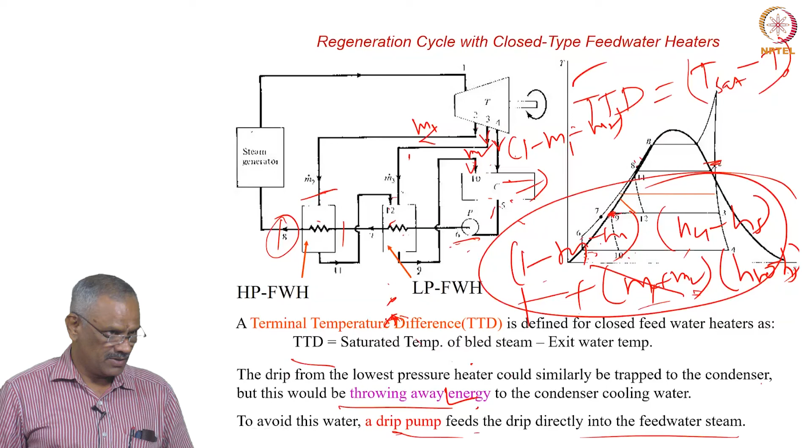So therefore the condenser will be bulky. Why don't we go for another way to keep the condenser smaller size?

So then what you do is bring the streams forward rather than going backward. This is called drain pumped forward. Here you see it is taken at high pressure, then after draining it is pumped to the main stream, because this pressure is different from that pressure. So you need a pump, and the same way another pump here.

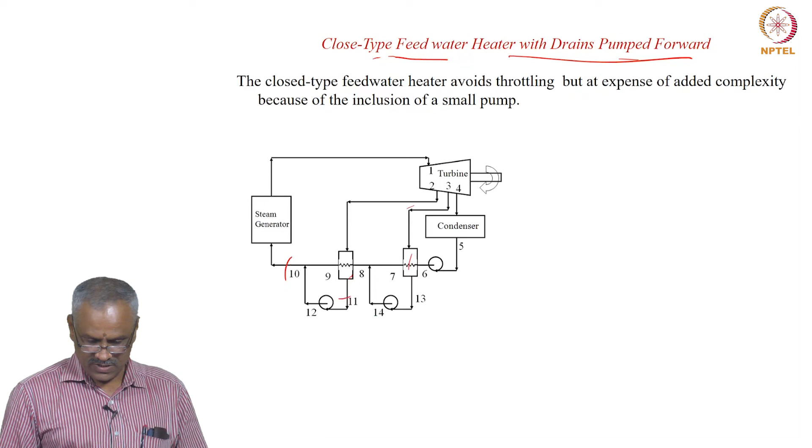So how do you represent this in a TS diagram? It is like this: nothing goes to the condenser, everything is pumped forward and put into the mainstream. Here you can write 1, 2, 3, 4, then 5, 6, then you have other drains here.

2 to 11 is one stream, and 11 to 12 is the pumping process, 2 to 11 is heat rejection, and 11 to 12 is pumping here. Then another stream is taken at 3 to 13, and then pumped from 13 to 14.

This is for pumping pressure point of view, these are the pressures. There is a condenser pump which goes from condenser pressure to the boiler pressure, a single pump, but the mass handled by this is different, and the pressure is different too, meaning you have different pumps with different flow rates and different pressure ratios.

This 5 to 6 is condenser pressure to boiler pressure, and this 13 to 14 is feed water heater pressure to the boiler pressure, and then this one is feed water 2 to boiler pressure.

These are, so if you look at this stream versus this stream, by a representation point of view, how they look like, it looks like a co-flow type. Co-flow means this fluid comes in and goes like this, and the other also goes like this. It can be a counter flow heat exchanger, but in this schematic flow diagram it is forward flow.

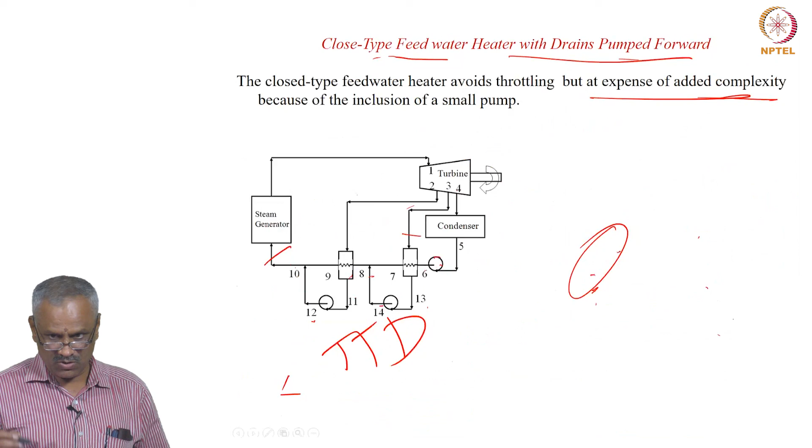See how many feed water heaters you can add like this. I mentioned a couple of minutes back that there can be 7 to 9, but at least one should be an open feed water heater. When you have open feed water heaters you have more irreversibility, but at least one should be open in order to avoid a lot of pumps.

Many pumps are there. If you go for 9, that means 9 pumps, and 9 pumps means your pumping power will be higher. So you have to have a trade off: bring all the streams and put it somewhere and then pump with 2 or 3 pumps. So out of 7 or 9 there should be one open feed water heater.

And not only is it required for mixing, but also consider what is the meaning of steam here? Our working fluid is water, which can be in different phases, liquid as well as vapor. When it goes through the pipelines, the pipelines are made of mainly high carbon steel, and when it passes through the pipes at different pressures, it interacts with the pipe material.

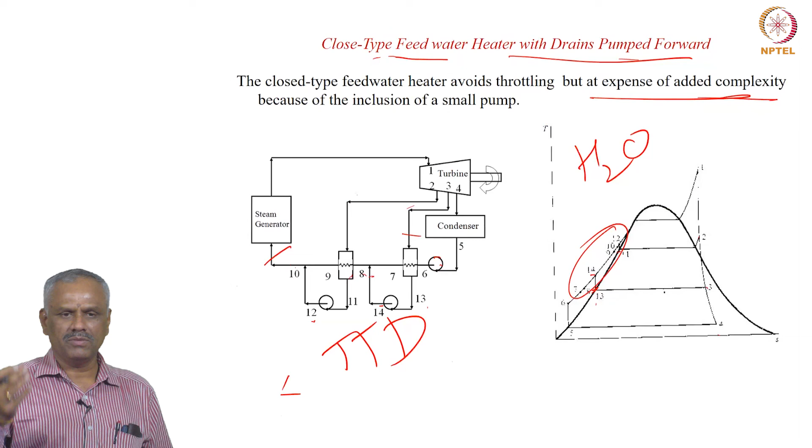Then there will be production of non-condensable gases. These need to be removed on a regular interval, otherwise there is a possibility of blockage, and not only blockage but also a heat transfer problem, because if you take a pipe where you are adding heat and the fluid is going with some vapor bubbles, the heat transfer coefficient to the bubble is different from the liquid. This uneven heating of the fluid may result in breakdown of boiler tubes, so the gases should not be there in the pipeline.

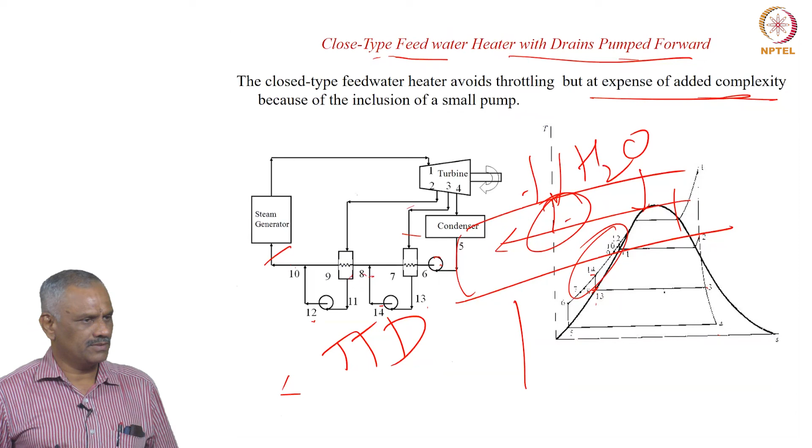So it has to be removed, and that can be done by this, it looks like this. I have already explained, no need to repeat. So there is one open feed water heater in the system which we call a deaerator, because removing the non-condensable gases continuously is called deaeration. Deaeration means remove the gases.

So if you look at that, there is one condenser, then one open feed water heater, and three closed feed water heaters here. So these two feed water heaters are brought back here, and this feed water heater is pumped forward. This one goes back to the condenser, whereas these two go to the open feed water heater, you can see this.

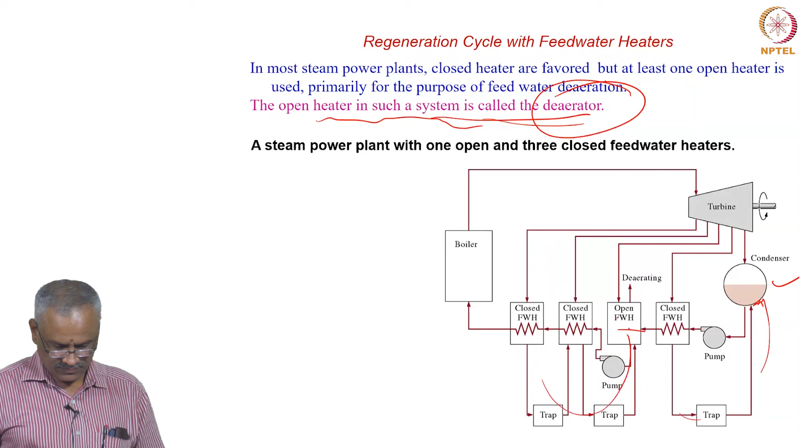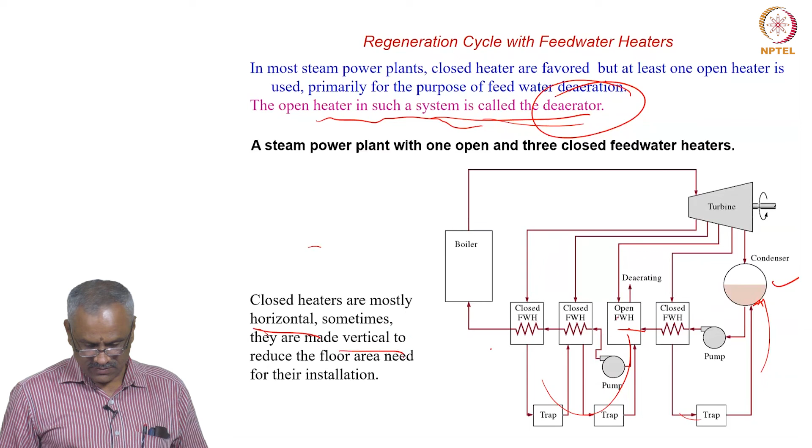As I have already mentioned, these feed water heaters can be horizontal or vertical. In one arrangement the fluid goes like this and another fluid comes here, or in another, one goes in this direction and the other goes in this direction. So essentially there can be more than 7 to 9 feed water heaters depending upon the capacity.

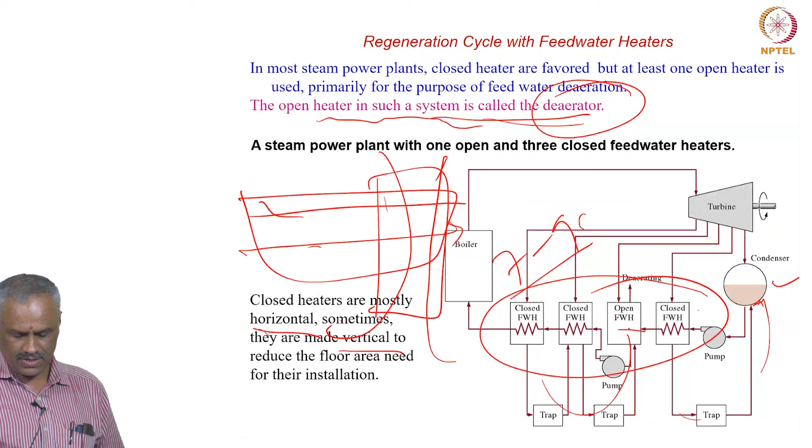Then we have to discuss regeneration, but we discussed reheating separately, and we will combine them in the next class. I will stop here — how to make a combination of both regeneration and feed water heater reheat. So in the next class I will stop here, and if you have any questions let me know. Thank you, I will close this.